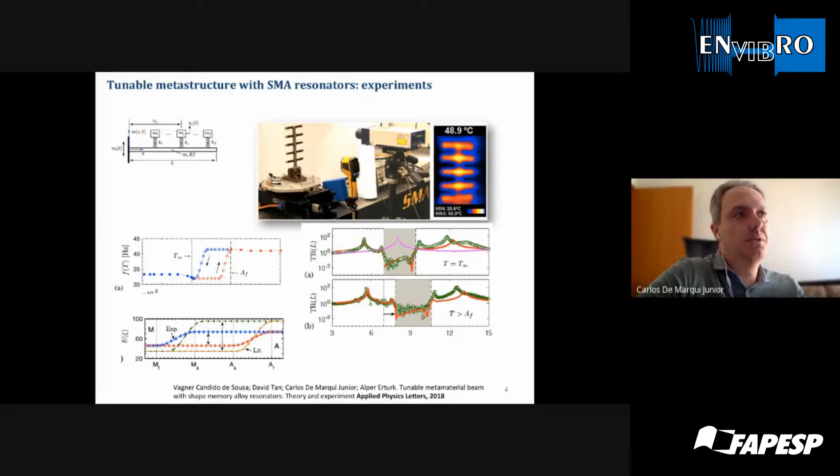We have some previous experience with Vagner Sousa, who nowadays is an assistant professor at Unesp São João da Boa Vista, with shape memory alloy-based metamaterials. So we have this experimental setup with a beam and SMA-based resonators. It's a thermomechanical system where we can control the band gap position by controlling the temperature of these resonators. We also have some experience with piezoelectric metamaterials combined with analog shunt circuits.

And more recently, we developed some digitally controlled analog circuits with which we could obtain this super wide attenuation zone in a piezoelectric metamaterial. It's reported in this paper. More recently, we started to develop some digital shunt circuits in order to replace the analog shunt circuits. And the idea is to improve the tunability or adaptability of these metamaterials.

And these digital shunts are working, and we could validate them for a resistive shunt and for a resistive-inductive shunt. So these are the numerical, the analog and the experimental results for the digital shunts, so they are working. What's interesting in this case, if you compare this picture here, this is the experimental setup for a single unit cell. It's a beam with piezo.

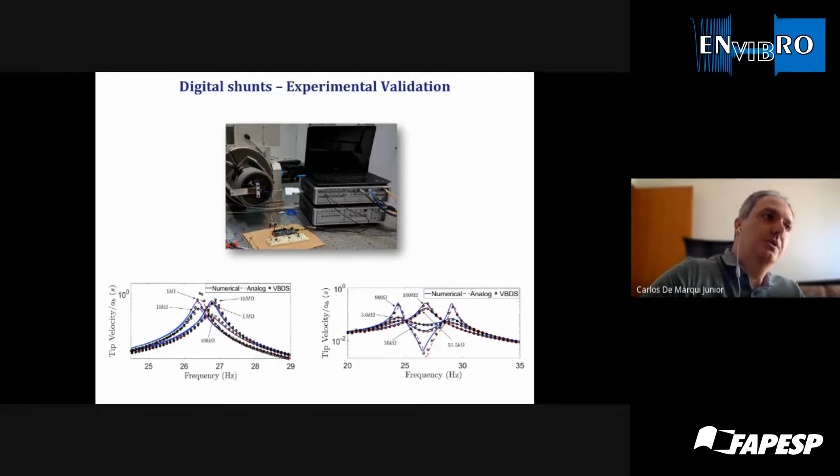If you compare with this previous one, where we were using analog circuits, the quantity of electrical elements and connections here has been reduced to only a few elements, since everything is inside the digital board. This digital shunt will be used in this, sorry, the picture is not very good, in this metamaterial beam. It's an aluminum beam with 12 piezos periodically distributed along the beam and connected to this digital shunt.

So if you believe that one of these setups or this previous experience can be useful for your research, please just contact us. We are available to collaborate or to help if you think it's useful.

Okay. So again, to our schedule, I'd like to invite Professor Leopoldo de Oliveira to share his screen and start his talk on membrane smart metamaterials.

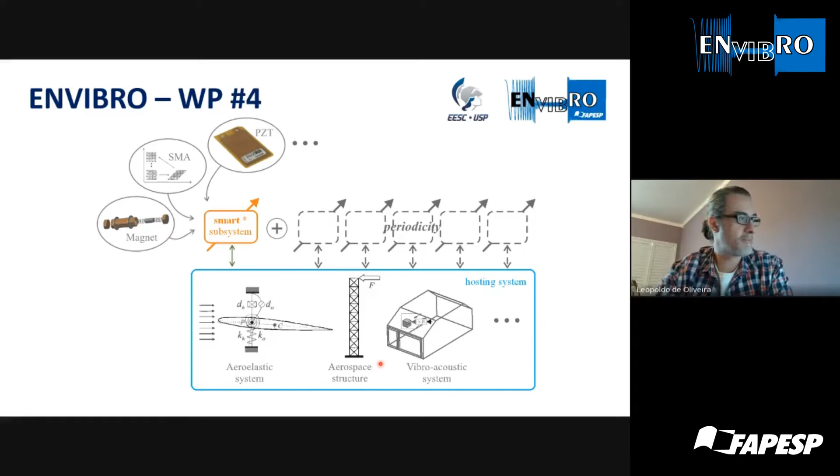Of course, for metamaterials, we consider that these unit cells will be repeated along a host structure, and this host structure can be of many kinds, including here, for example, things that we consider here in São Carlos, which is aeroelastic systems or vibroacoustic systems, or even structures that could be dedicated for aerospace applications.

So the first example I want to show you was like a clamped beam, where we include an increasing number of those unit cells to analyze the evolution of an attenuation band, because this is like a finite structure with boundary conditions, and the wave reflections here will promote such an attenuation band, not a band gap in the sense of a pure, ideally periodic structure. And as you see here, we were targeting the second resonant mode of the beam. And as from 10, 11, 12 elements, we reached a plateau on the performance. There we decided to build a setup to experimentally verify this phenomenon.

We start with a single degree of freedom mechanical resonance system and added piezoelectric elements and a shunt circuit with an inductor and internal resistance to realize this shunted unit cell. These are some simulations of the concept unit cell. This is built on plastic material, so on 3D printing. The piezo disc is glued to the beam, and this thinner part here will be the flexible element of our single degree of freedom system. This is the concentrated tip mass. This is a picture of the first prototype with the disc.

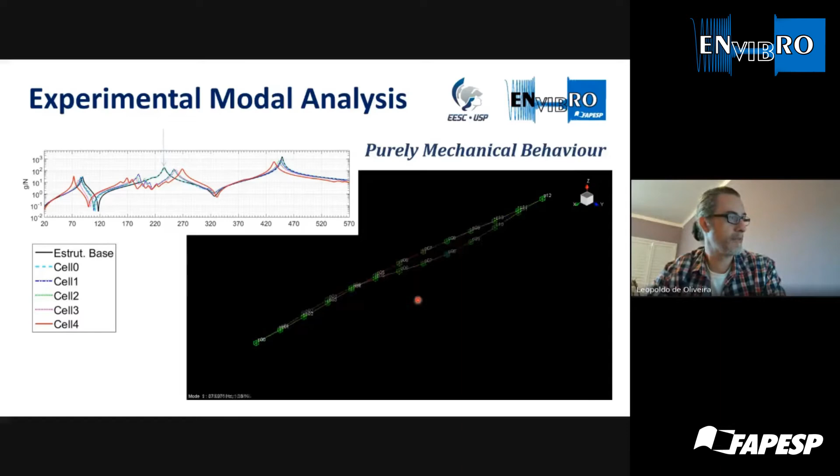So, of course, when we have the empty beam, we have vibration modes as expected, first, second, and third vibration modes. When we put several of those resonators to the beam, we see, for example, in the first resonance that they will move in phase with the beam, as they were designed to resonate close to the second mode. When we go close to the second mode, then the attenuation starts to work, and as you can see here, the beam is almost standing still, whereas the resonators vibrate resembling that second vibration mode of the beam.

Not all of them do in the same way, because it's, again, an experiment. There is variability, uncertainty in the manufacturing process, as well as in the assembly, where we glue them to the beam. The effective length of the bending is a result of where we exactly glue it. So although we have jigs to try and make it as close as possible to each other, there is always some imperfection. And since it's a finite structure and we do have those reflections, we can assume that there will be some poles, so resonances, if you like, within the attenuation band. And these are some of the modes that we see there. You see again, there's various configurations of the elements vibrating, and the structure remains still.

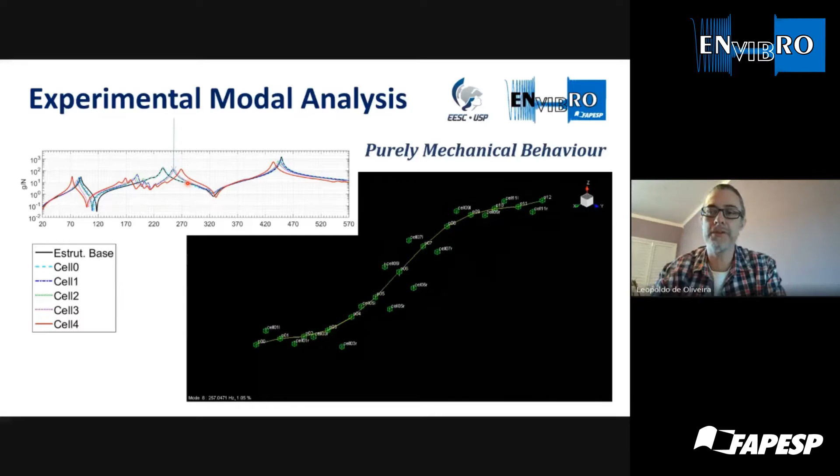So I'm going to jump here. If you follow the arrow there, you can see where we are. So when we reach a peak that is close to the border of the attenuation band, then the structure starts to vibrate again. So what happens when we assemble everything there? So we now have these extra degrees of freedom you see in the border are the voltage across the piezos. And now we are just monitoring the voltage, as the shunted circuits are not connected yet, so it's an open circuit. And there, in the attenuation band, we see now the masses vibrating, and we can see some voltage going through the piezos.

And okay, that's what we get from just a purely mechanical system, let's say, that is modified by the piezo, but without any attached circuits yet. Finally, when we do connect the shunt damping, the result looks like this. So the structure is standing still. Now you see the masses also vibrate, but not as strong as before.

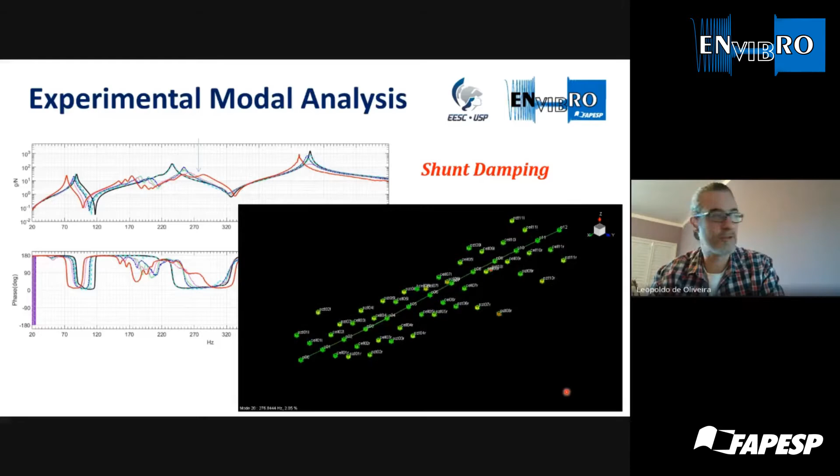And we see a lot of the energy going through the electrical domain. And the vibration you see here also actually represents the voltage going through the shunted circuit, which is now resonating and taking that energy away from the system.

As a second example, I want to talk about the membrane applications. We went for membranes because they will be very lightweight structures. And if we add a mass to the center of a stretched membrane, we get what they call a decorated membrane resonator, which will exhibit these two resonance modes.

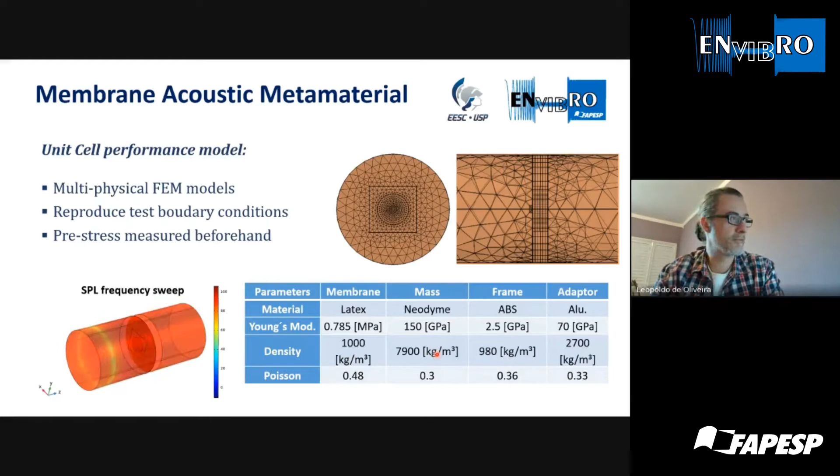Of course, in resonance, these systems will radiate a lot of noise, but in between those resonances, we expect to see an anti-resonance, and this anti-resonance is supposed to provide some transmission loss if we build a structure based on those decorated membranes. So we made some finite element model of the decorated membranes, and here are some values that have been updated based on these experiments that we carried out with the actual membranes.

So this is like a latex rubber material that we stretch. We have a means to control the amount of stretching we provide. Then we build these frames that will give the final shape of the membrane. Here's an example with various shapes and sizes of membranes. We glue it to the stretched rubber and finally get a membrane that we can assemble in such a transmission loss setup and analyze its performance.

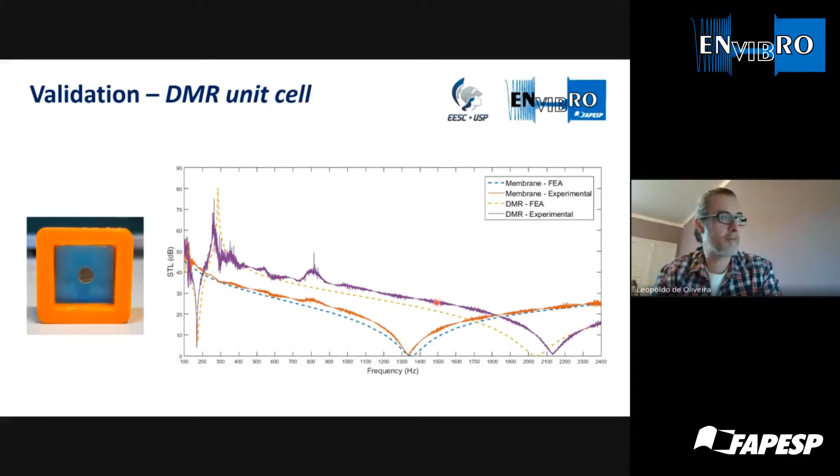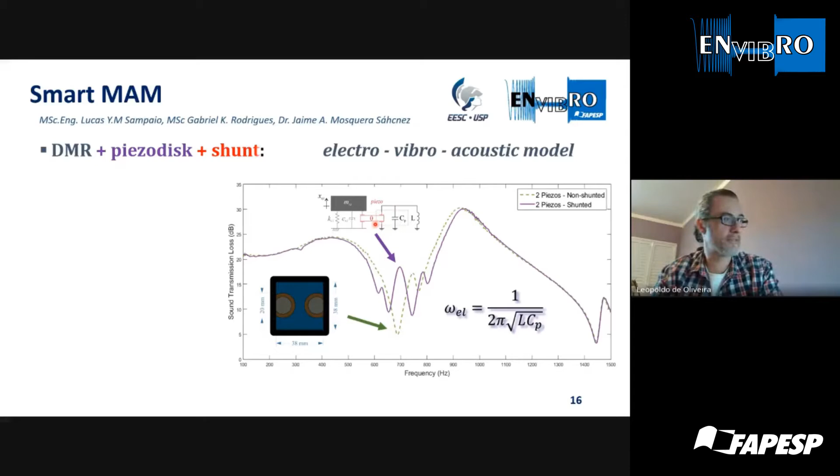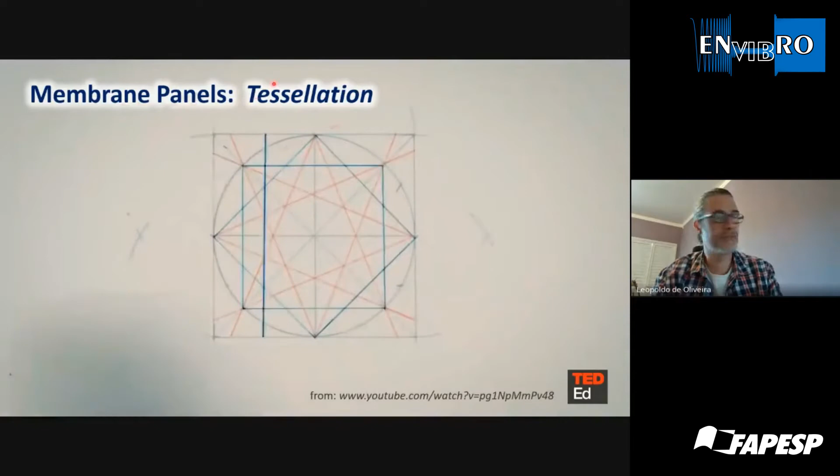To design such elements, for example, we can look into Islamic art. This is an example of how you derive those geometric shapes. And the interesting thing about these geometric shapes is from some lines and curves, you can draw some patterns that actually tessellate the plane. And by tessellation, I mean, when we look into geometry, you have those shapes that when they are combined, they will completely fill the space.

So if you think about a panel, we have a 2D space, and when you derive any forms based on those figures, you have automatically something that fills the plane and could have interesting vibroacoustic performance. To address this, we already did some initial trials with these kinds of combinations.

Of course, they are not squared repetitions of each other, so we still have to look into how to apply Floquet-Bloch boundary conditions to analyze those in an infinite sense. But we could already build some of those, simulate in a unit cell level, and see that they indeed have several resonances that broaden a bit the effect of transmission loss close to those resonances and anti-resonances.

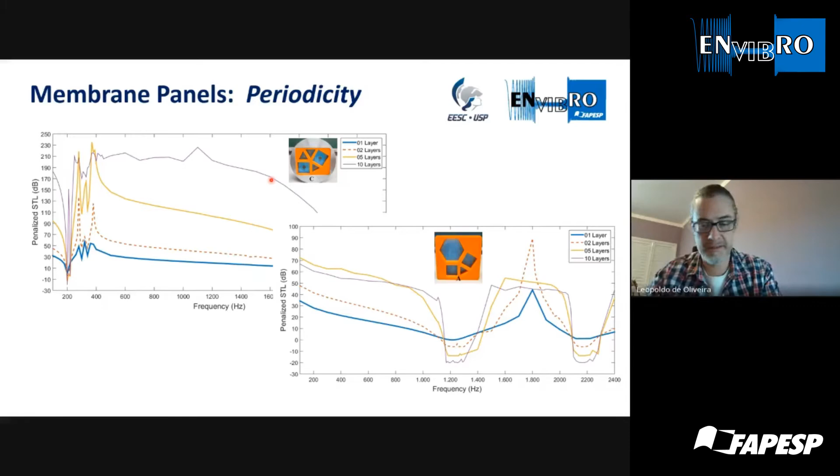We can add masses to some of those squares and not to others, and have indeed unit cells with several resonance frequencies. Just as a means of looking into the future a little bit, we want to further explore those smart elements inclusions and also have more complex circuits attached to them, so like nonlinear circuits, nonlinear energy sinks,

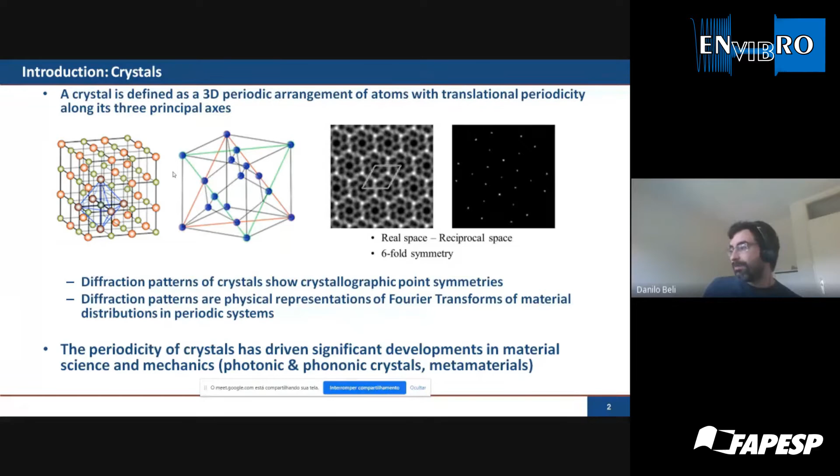And we can do differently. We can use other kinds of symmetries to provide a better way to manipulate waves, symmetries that are not allowed in the crystals. Let's see if this is possible. And in the 80s, Dan Shechtman discovered the quasicrystals, a way to fill the real space without repeating the unit cells.

And these quasicrystals also have this diffraction pattern that follows some order, but not the order of the crystals that follows the 2, 3, 4, or 6-fold symmetry, but an order that has a rotational symmetry that is not allowed for the crystals, like this one where you have 10 peaks with rotational symmetry. So it's possible to fill the space, but not with unit cells, in a different manner that can have other wave properties too.

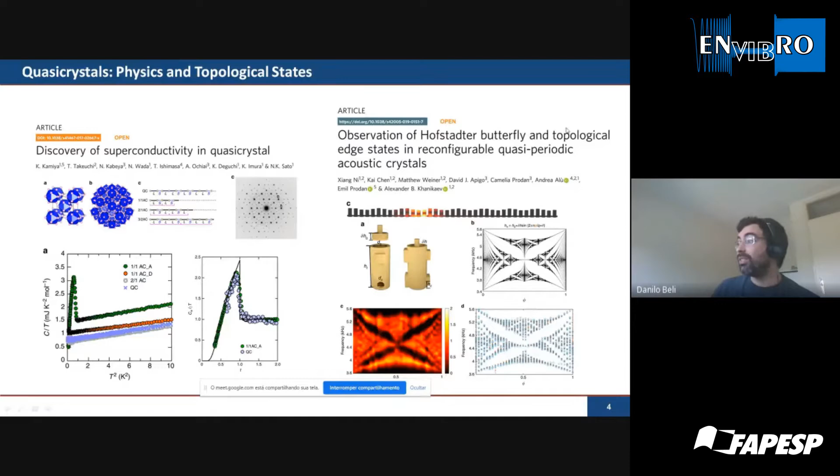So people started to look at the quasicrystals, and they discovered some phenomena related to superconductivity, and also topological states like Matheus presented last time, but also in mechanics to have isotropic stiffness or failure resistance, or even in wave propagation to have different band gaps or isotropic wave propagation. But here we are interested in the wave directionality and diffraction in high order fold symmetries that were not allowed for the crystals. But first I will show you how to design these quasi-periodic plates.

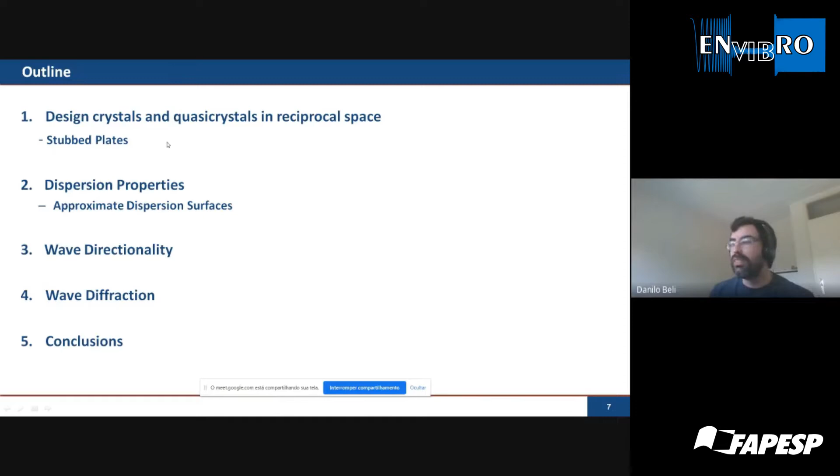And after, I will show you how to obtain some dispersion properties for these quasi-crystals and so on. Okay, so for the periodic cases, we have these rotational symmetries, and they are attached to this restriction theorem that it's possible to fill the space with these rotational symmetries in a tessellation procedure, where you can use 4-fold or 6-fold unit cells, or triangles, square unit cells, or hexagons, but not pentagons. If we use pentagons to fill the 2D space, you have some gaps or voids, so it's complicated to fill the space with symmetries that are not the ones that crystals have.

So how can we do that in a simple way? We use a procedure that was presented by Lubensky, where we assign peaks in a circle in the reciprocal space. The number of peaks here gives us the symmetry in the physical space. So we have peaks that are equally spaced in the reciprocal space. And by using this equation here, like an inverse Fourier transform, you can recover the physical space.

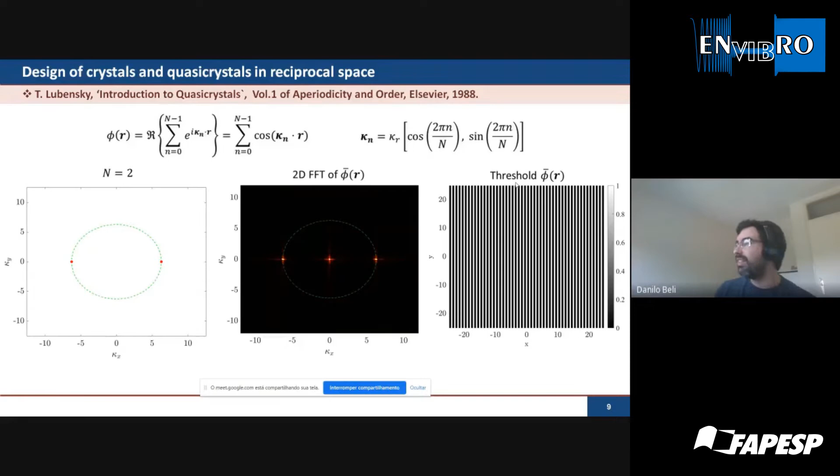Like here, I assign just 2 peaks, so I have a bilayer distribution. And this bilayer distribution has the same spectral contents of our design, but here you have a peak in the middle that gives us the DC level, okay? Here we also have a threshold that I will not explain here, but in the next slide it will be more clear how this threshold works, okay?

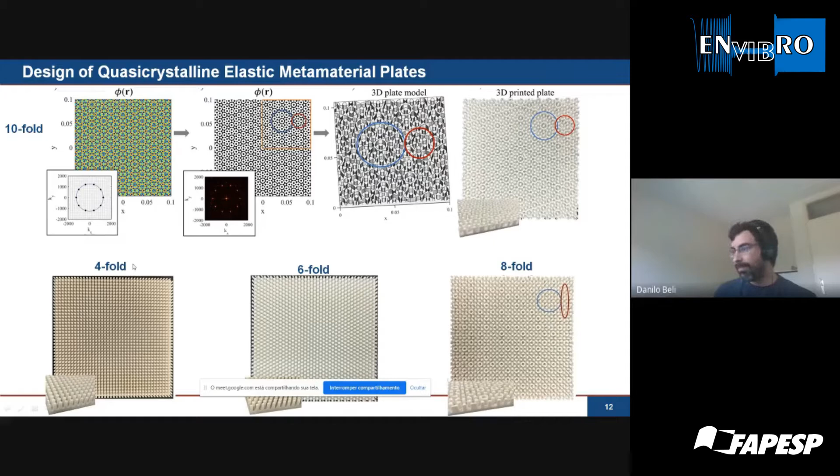And we did the same for other fold symmetries, like the 4-fold, 6-fold, and 8-fold, so we can compare the quasi-crystals with the crystals: what is common and what is different between them, okay? But how can we investigate these quasi-crystals if we don't have translational periodicity? We cannot apply the Bloch-Floquet conditions at the boundaries of these quasi-crystals. How do you define a unit cell?

So we used an indirect approach based on time simulation. With this time simulation, we have a full space. We recovered the displacement field in x, y, and time. So we have a fully populated cube here with displacement points, okay? And we can compute the Fourier transform to transform the physical space into reciprocal space. But again, all the points in this cube have a wave, so we cannot see anything.

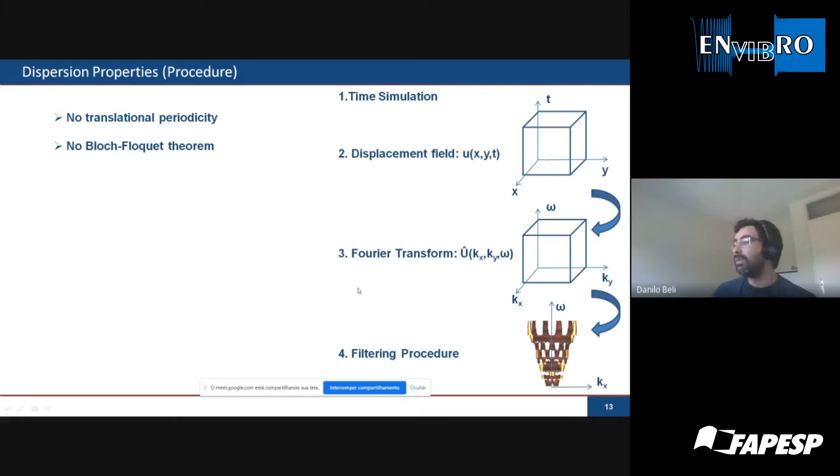So we need to apply filtering to this Fourier transform. We neglect the waves with low amplitude because they don't influence our dynamic response, and only consider the waves with high amplitude. So we can see the spectral contents that we wanted. And the advantage of this procedure is that we can also compare with experiments. If you perform the experiment on the plate, with your excitation in the center, and you measure the displacement field over several times, you can do this same procedure and compare with the numerical simulations, okay?

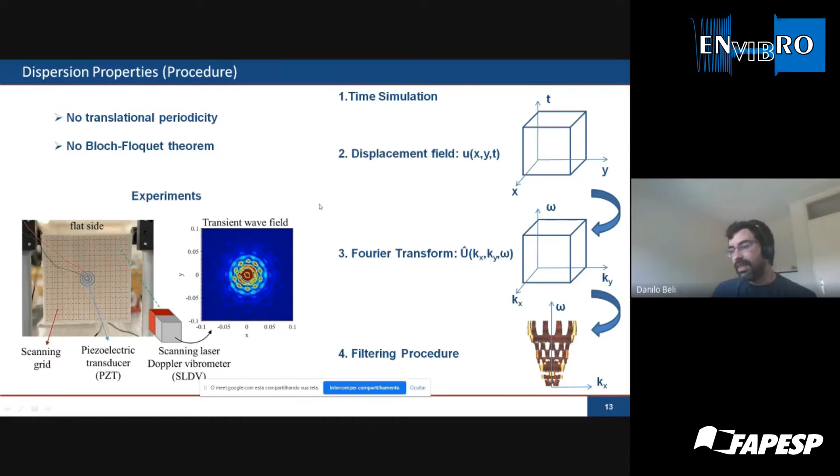So let's see what you have for, but first, we also validate this procedure for the 4-fold. So we can compute the band structure by applying the Bloch-Floquet conditions. And this is our approximated band structure. So we can see that the gaps match in 10 and 50 kilohertz, but also the propagating bands are the same. We can see the frequency response here.

But in our case, for the 4-fold, we don't have any anisotropies, so we have circular wave number contours. But what happens for the quasi-crystals? Because we have the same pillars for the crystals, for 4-fold and 6-fold, we have the same pillars. So it opens band gaps in the same frequencies here for the 4-fold and 6-fold, okay? And our propagating band, it's isotropic.

But for the quasi-crystals, we also have the gaps here around 10 kilohertz and 50 kilohertz, but this band here splits in several bands. So we have a fractal nature of these bands because of the fractal nature of the quasi-crystals. And they are highly anisotropic and they change with the frequency. So we can use these bands to manipulate the waves in a better way and also to have a high order wave beaming, as we'll show in the next slide.

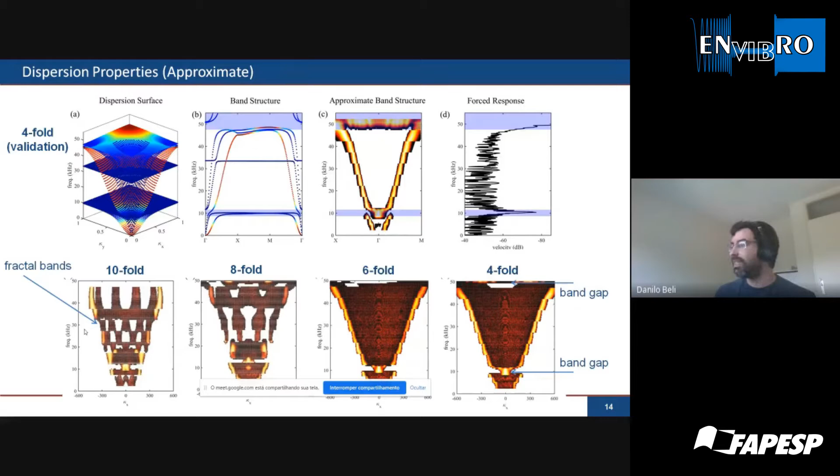Okay, but let's see what happens in the time domain, in the physical domain. If we consider a frequency here almost closer to the first gap, you can see this beaming in the tenfold symmetry. If you change to a higher frequency, you can see that the beaming happens twisted between this one. So these results expand the results of the crystals, because before the beaming was just allowed in the symmetries of the crystals, like 4-fold, 6-fold, but not in 10-fold.

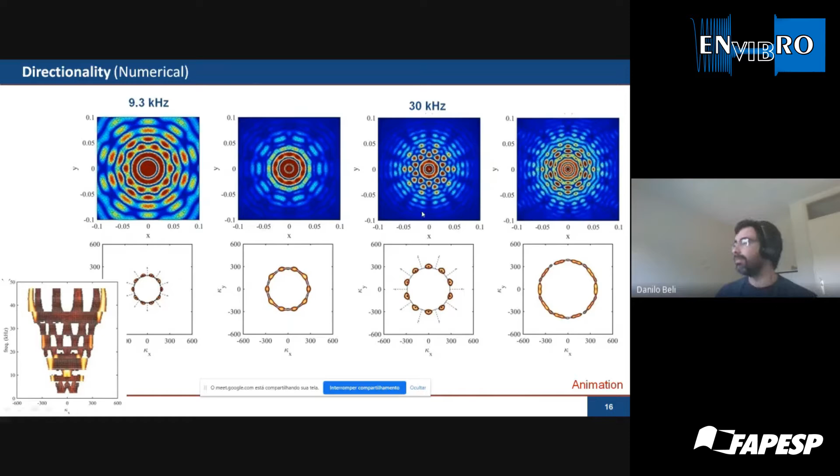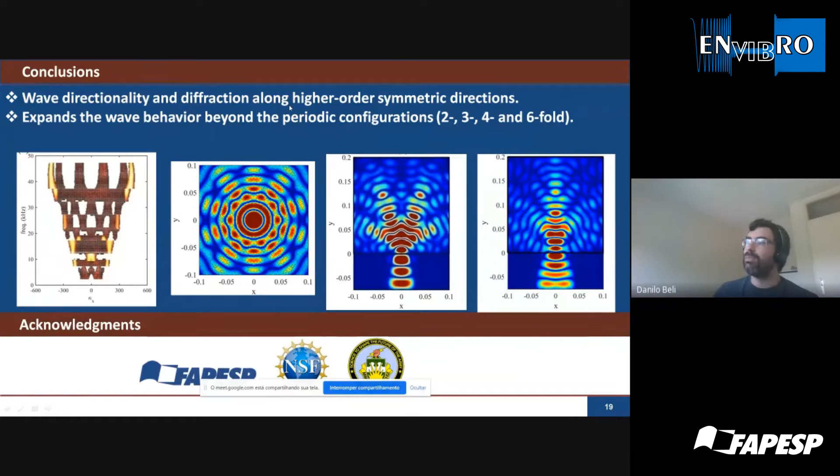I don't know if I took too much time to explain, but these are the conclusions: the wave directionality and diffraction along the higher order symmetric directions, and also we expanded the wave behavior beyond the periodic configurations. Okay, and we already published this paper on the left, whose results I didn't show, but it explains a lot of the designs, and the results that I showed today we'll publish soon. Maybe it will be on arXiv soon.

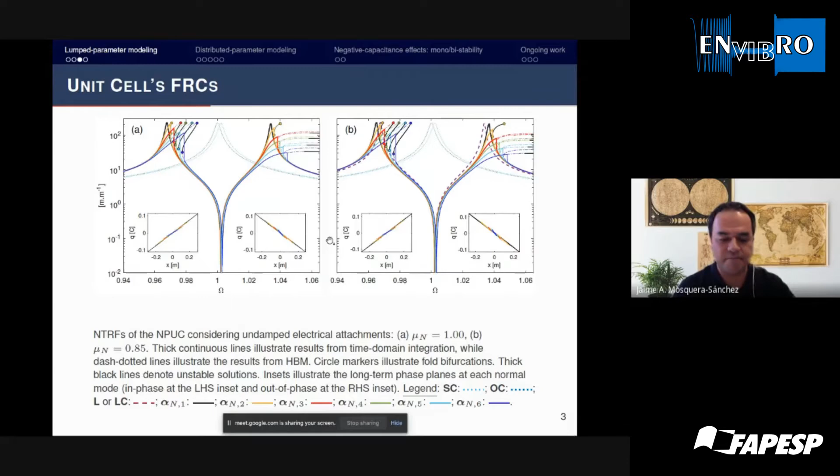Well, and after that, we proceeded to integrate the equations of motion for a set of 20 nonlinear unit cells, and we verified the effects of the nonlinear part and the negative capacitance part.

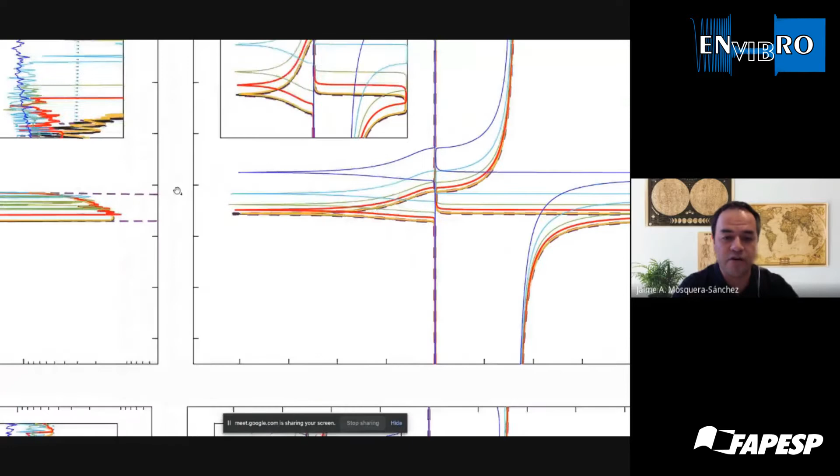Well, so in order to understand the effects, we also developed some analytical expressions to study the band structure of such a unit cell, in which we identified that as the level of nonlinearity increases in our system, the band gap location and limits start shifting to the right side, to high frequencies. And we also verified such a behavior with the forced responses of the system, in which we can also see that the band gap limits or edges are starting to shift to the right side.

And another particular observation we also obtained is that as the level of nonlinearity increases in the system, the band gap starts becoming dominated by some harmonic and quasi-periodic solutions, which are proof of the wave supratransmission effect.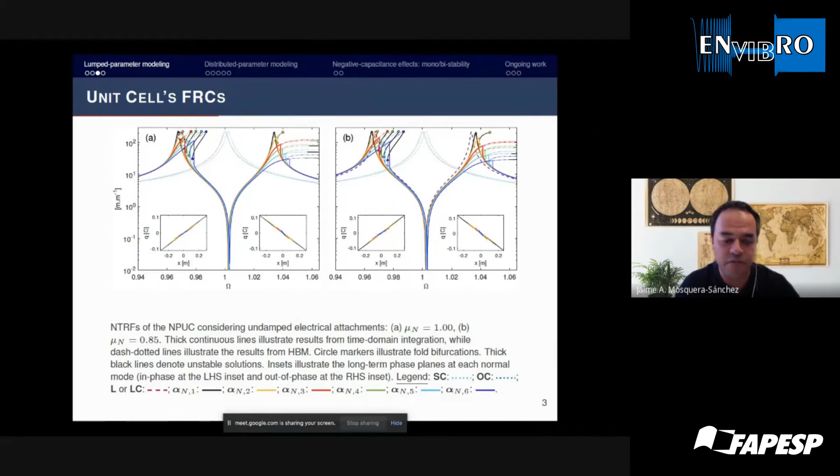Such an effect can be traced back to the emergence of the fold bifurcation, which is happening, let me show, at the first in-phase mode. So as the fold bifurcation starts shifting to the right side, the wave supratransmission effect becomes apparent in the responses. And this effect happens at both kinds of oscillators, I mean, in the Duffing oscillator and in the essentially nonlinear oscillator as well.

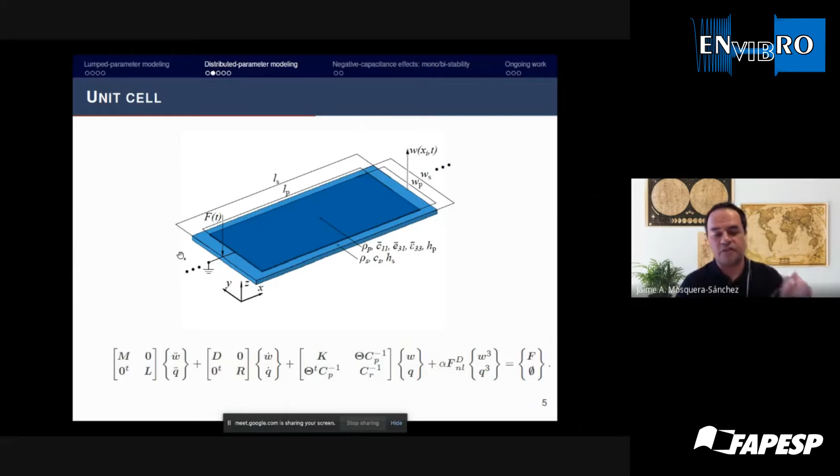Well, moving to a distributed parameters model, we used a 1D beam provided with several equally positioned unit cells with the same parameters, and we started studying the forced responses of the unit cell, in which we found the same effects as the ones we found in the lumped parameter models.

And we also could study the transmissibilities of such kind of unit cell, in which we can see that as the level of nonlinearity increases in the system, the transmissibility in this case becomes flat within the band in which the transmissibility is low. Those results are related to the unit cell.

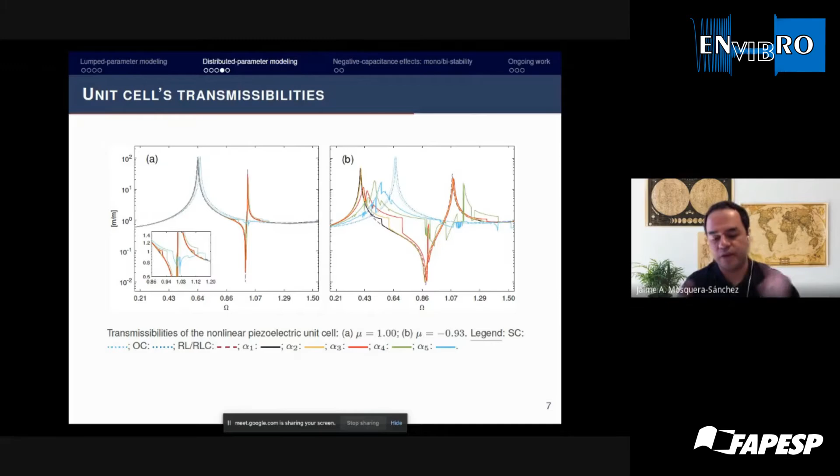So in order to study the metastructure effects, we integrated the equation of motion for a set of 12 unit cells in a beam. And I will show you only the transmissibility results, in which we can see the following observations. So along the rows, we can find the effects of the negative capacitance, in which we can see that the linear band gap is opening as the negative capacitance improves.

And we can also see the effect of the cubic part in the circuit, in which we can see that as the level of nonlinearity increases in the system, the band gap's limits become shifted to the right side. And as the level of the nonlinearity becomes quite high, we can see that the transmissibility gets flat, and this is due to the effect of the wave supratransmission effects.

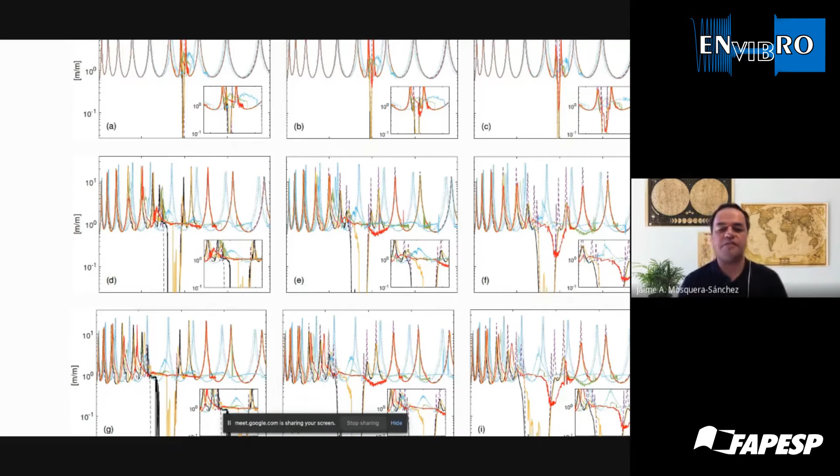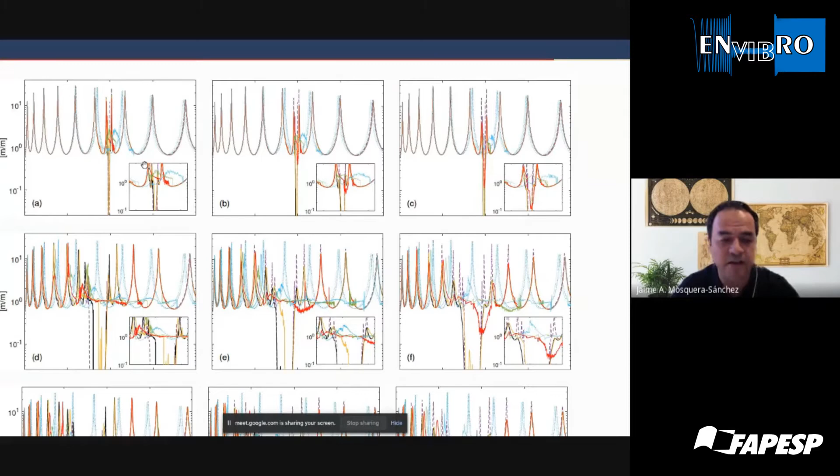In the columns, we can see the effects of the damping in the electrical circuit, in which we can see that for the Duffing oscillator, the small band gap starts becoming apparent. And as the damping becomes more evident in the system, the damping becomes the dominant mechanism in the system. So the cubic part becomes masked in some sense, giving rise to more linear effects. And such behavior was verified in the other combinations of the negative capacitance.

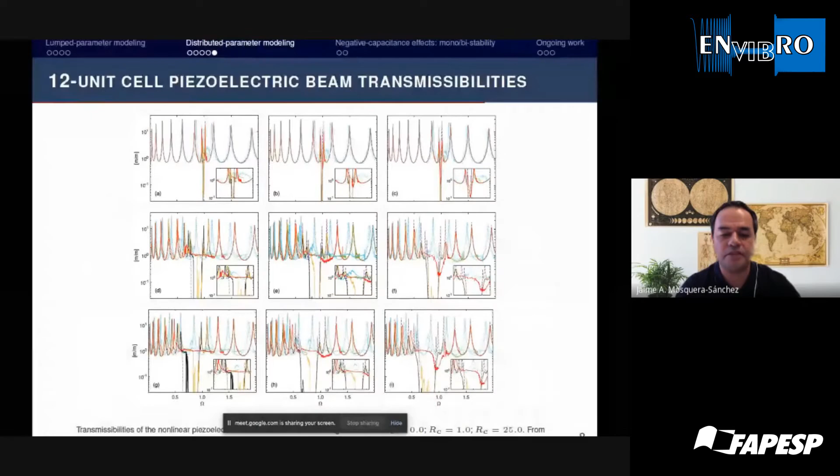Okay, so those are the results from my metastructure. And last, I will show you some preliminary results on the effect of monostable and bistable circuits in the system. This slide is quite heavy, so I will ask you to wait a while.

Okay, so those results are based on the sign of the negative capacitance, in which, as we have a linear positive residual capacitance in our system, we will have monostable resonators. While if we have a linear but negative part in our oscillator, we will have a bistable resonator.

In those cases, we can see that we can shift the edges of the band gap, of the band region in which we have a transmissibility below 1, to the right in the monostable case, while for the bistable resonator we can move the band gap edges to the other direction, I mean to the left direction.

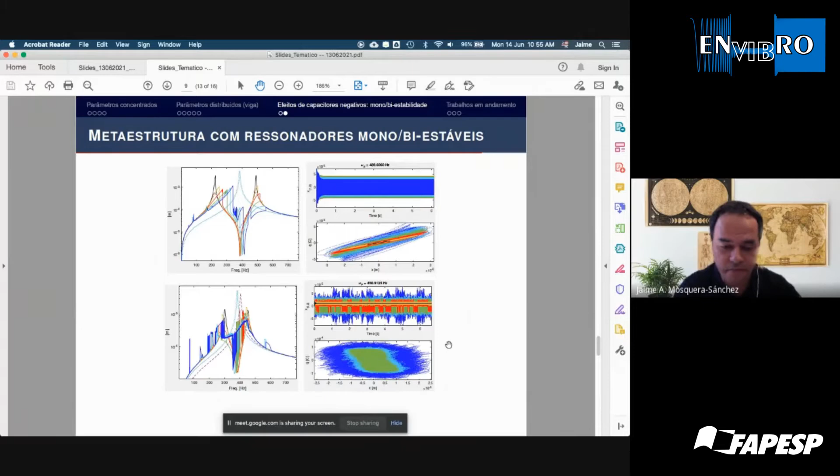So for the monostable case, we have the displacements around one stable point at the 0 point. And for the bistable case, we can see the intrawell and interwell behavior, which accounts for shifting the band gap limits to the left side, instead of the monostable resonator, which shifts the band gap limits to the right side.

Okay, so, oh my God. No, I will be unable to show you the responses.

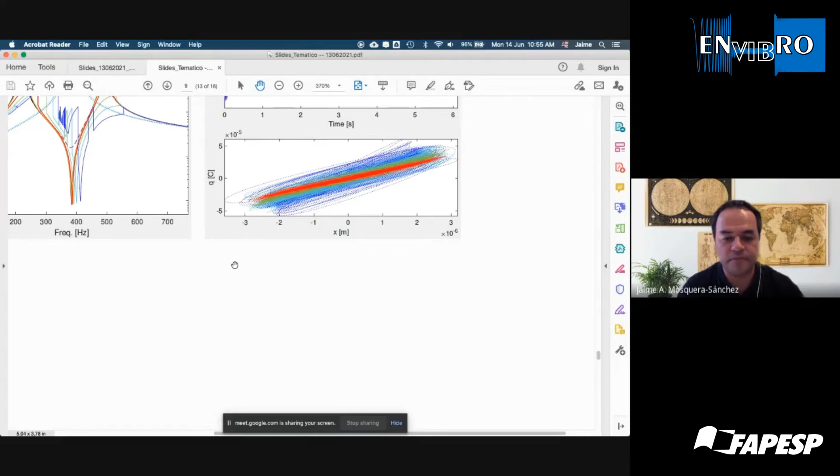Okay, so for the lowest nonlinear regimes, we can see that the displacement happens around one stable point, which is offset from the 0 position. And as the level of nonlinearity increases in the system, we can see some intrawell and interwell displacements, while the highest nonlinear levels will show quasi-periodic and chaotic behaviors. So those are preliminary results which are still under study.

So let me conclude with some ongoing work. But yeah, my computer is about to crash.

Okay, so to conclude, I will show you some numerical works which are ongoing. So the mono and bistable resonators are currently being integrated by using some high-performance computers here at the University of São Paulo. We're also approaching some plates to see the effects of the negative capacitance and the cubic part in the vibration attenuation. And finally, we are also studying the band gap formation using internal resonances.

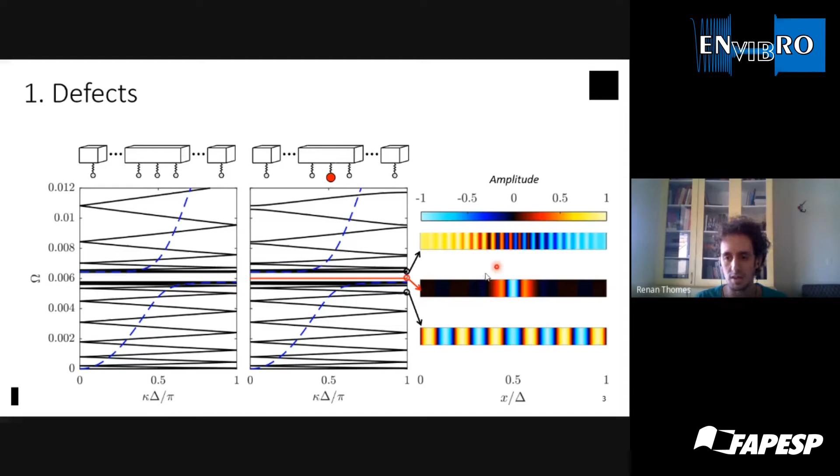So we all know that a series of local resonators attached to a host structure will open a band gap close to their resonance. And if we have a defect in one of those resonators, for example, a different mass here, that will cause a defect band to appear inside that band gap and wave localization around this defected unit cell.

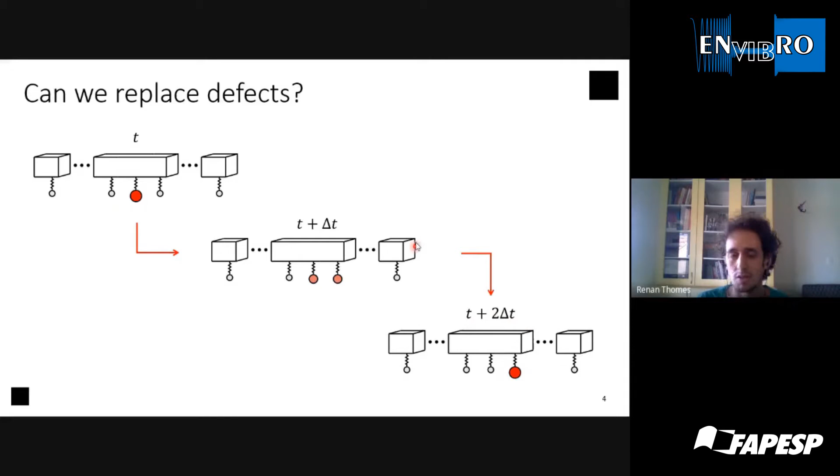However, can we somehow replace those defects along the structure in order to concentrate energy at specific locations and specific times? Well, with piezoelectric materials, we actually can.

But the point here is that we can actually change these inductances with respect to time by using digital circuits or even analog circuits too. So with this, we can modify the properties, the dynamic properties of these resonators as a function of space and time.

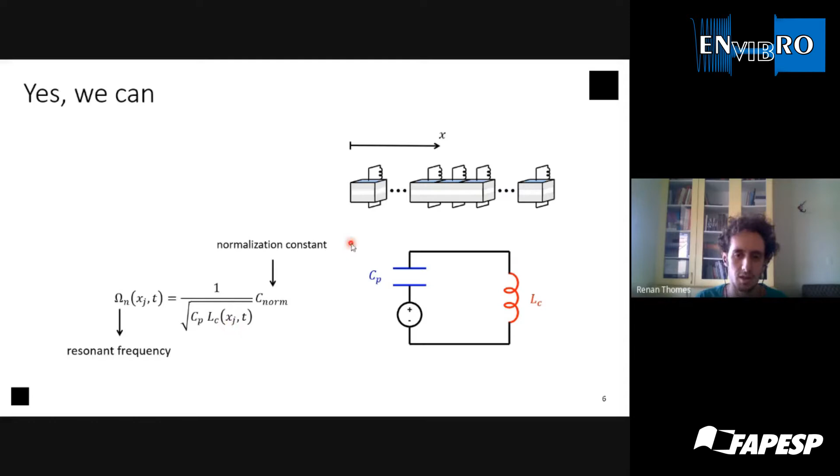And for doing this, we are studying this electromechanical metastructure. It is a beam composed of 21 local resonators and unit cells. And throughout this presentation, I will say that a resonator is in the periodic configuration if its resonant frequency equals omega t, which is the tuning frequency. And I will say that the resonator is in a defect configuration if omega n equals 2 omega t.

And the band structures that I showed you before are actually for our electromechanical supercell. So when all the resonators are in the periodic configuration, we have the traditional band gap here. But when we have a defect at the 11th resonator, which is in the middle of this beam, we'll also have this defect band with concentrated energy around here.

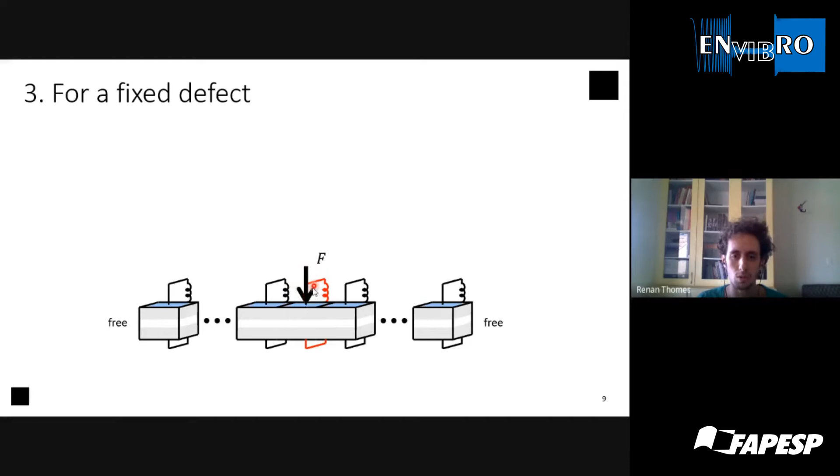So after this spectral analysis, we're going to study now the time domain response for a fixed defect. And for this, we're considering free boundary conditions. And we have also a defect at the 11th resonator here. And we are applying a point load in the middle of this beam, which is a sine burst at the defect band frequency. And for these considerations, we have this response. Actually, this is the envelope of the response.

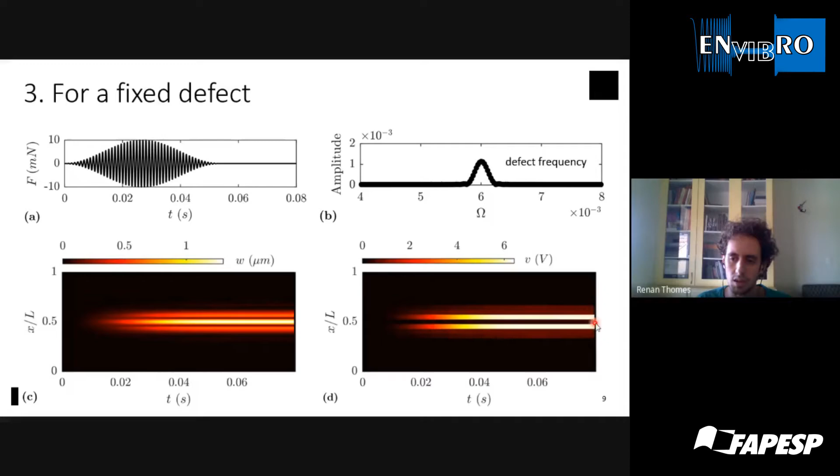But here in the left, we have the transverse displacement of the beam as a function of time and the position along the beam. And as expected, we have concentrated vibrations here around the defected unit cell. And this figure here in the right shows the voltage output in the piezoelectric elements. And notice that for the resonator that has the defect, the voltage output is almost zero since it's excited far from resonance, and maximum voltage occurs in the cells adjacent to the defect.

Now we are going to program those defects along the structure. That is, we're going to replace those defects along this beam. And for this, we're going to impose a law to the resonant frequency of those resonators. But remember that we are actually changing the inductances of these circuits.

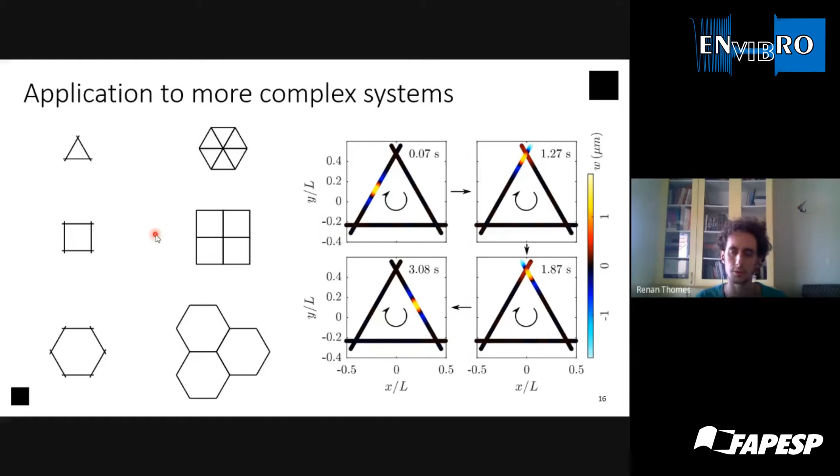In conclusion, we presented a piezoelectric metamaterial whose space-time modulation of the resonant shunts creates programmable defects, and our strategy perfectly transfers energy between subsequent unit cells and confines vibration energy in space and time. And these concepts may also be applied to guiding, sensing, monitoring, and energy harvesting.

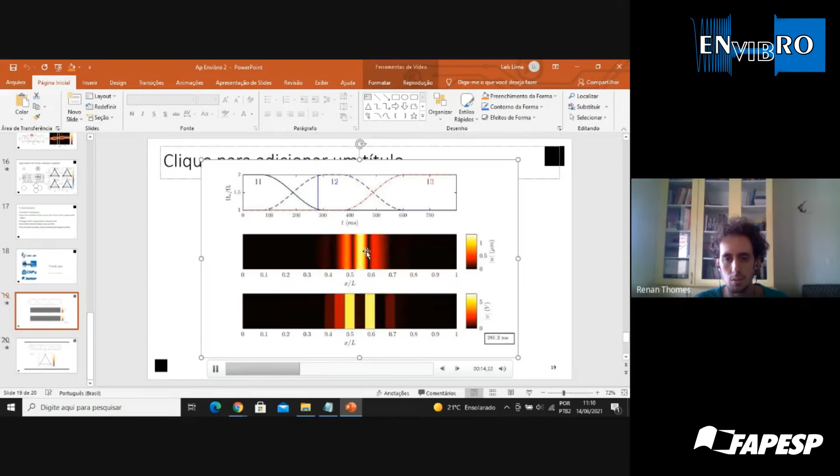So before I stop talking, or while you think, I'd like to show you a video of the theme that I presented. So we begin with localized energy here at the middle, and then as we change the electrical resonances of the system, this energy begins to be displaced and transferred to the right-hand side of the beam.

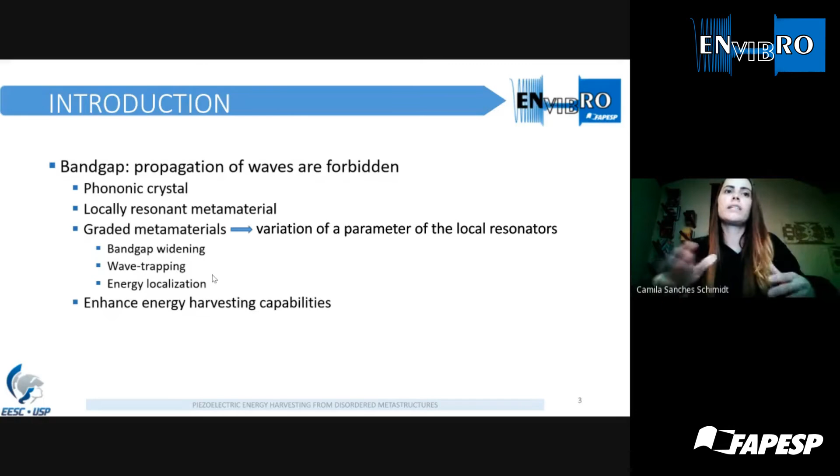And this variation produces band gap widening, wave trapping, and energy localization. And this energy localization can be used to enhance the energy harvesting capability. However, energy cancellation occurs when continuous electrodes cover the strain nodes. Then, in the present work, a criterion for electrode segmentation will be presented to avoid the energy cancellation.

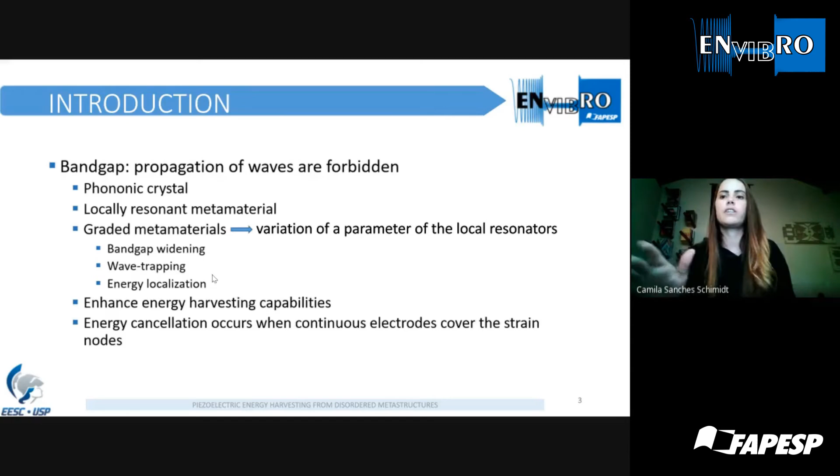The system studied is a cantilever bimorph beam made from an aluminum substructure with piezoelectric ceramic layers of PZT-5A under harmonic base excitation with 15 mechanical absorbers. The configuration of the electrodes for energy harvesting will be analyzed in two cases, continuous and segmented. But in all cases, they are connected in parallel to a resistive admittance.

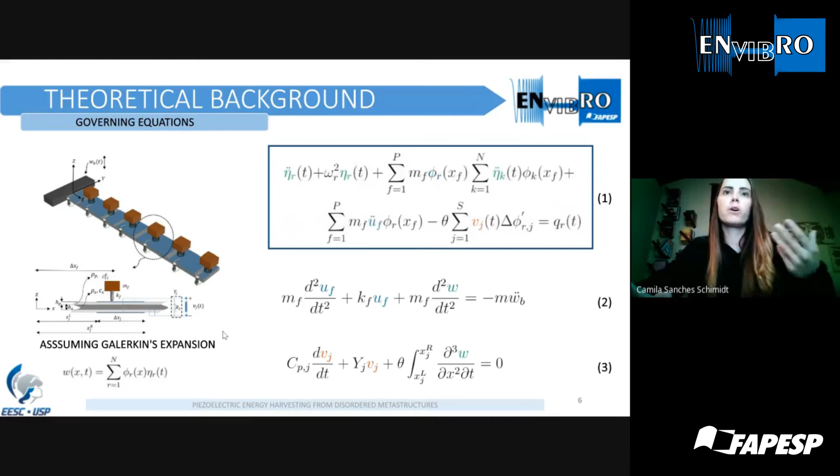The governing equations for the bimorph, absorbers and shunt circuits were obtained considering Euler-Bernoulli theory. Then, assuming Galerkin's expansion, we can obtain our equations in the modal domain for the bimorph, absorbers, and shunt circuits. Then, assuming that the response of the system is harmonic at a target frequency, we have the amplitude for the absorbers and voltage amplitude. And substituting this expression in the modal governing equation, we have our final expression.

To obtain the graded metamaterial, a variability in the frequency of the absorbers, which follows this linear law, was adopted, where omega k is the natural frequency of the beam, beta is the slope disorder degree, n is the number of absorbers, delta is the distance between them, and L is the length of the beam.

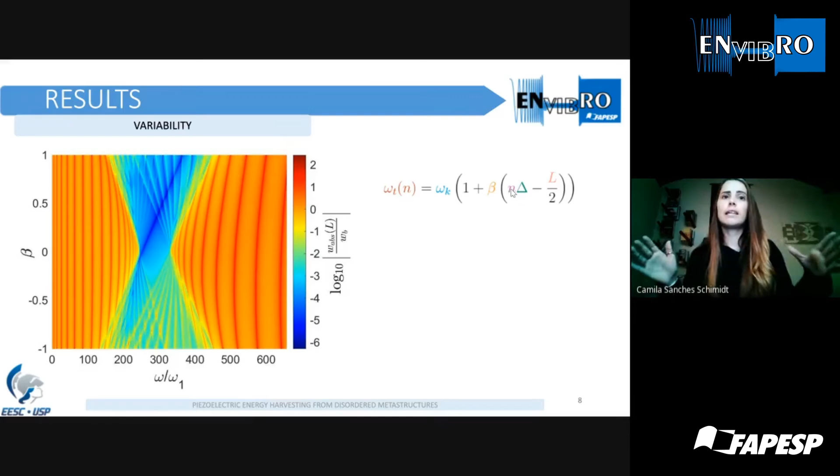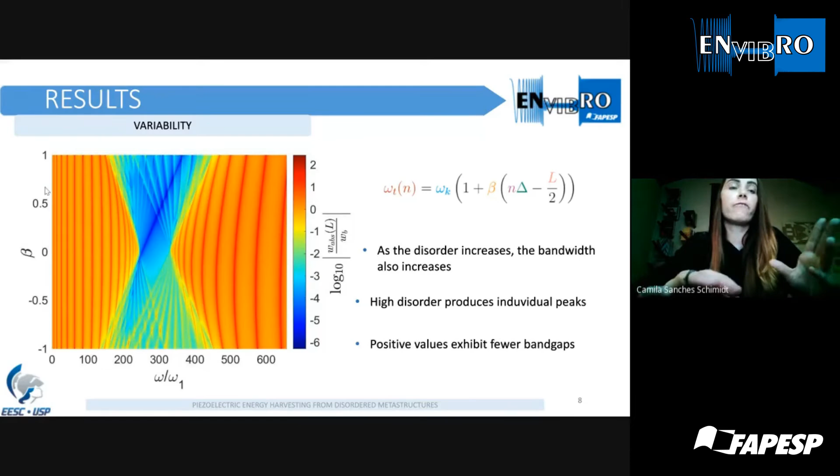From the figure, it's possible to see that as the disorder increases, the bandwidth increases. And high disorder produces peaks of vibration between the individual band gaps. And positive beta values exhibit fewer band gaps than negative ones.

The transmissibility was investigated for descending, uniform, and ascending patterns. For the descending and ascending patterns, it's possible to see that the bandwidth varies along the frequency and metastructure length. Then the wave trapping phenomenon occurs below a reflection interface that divides propagation and non-propagation zones. And when all the absorbers are tuned at the same frequency, a uniform and well-defined band gap is created.

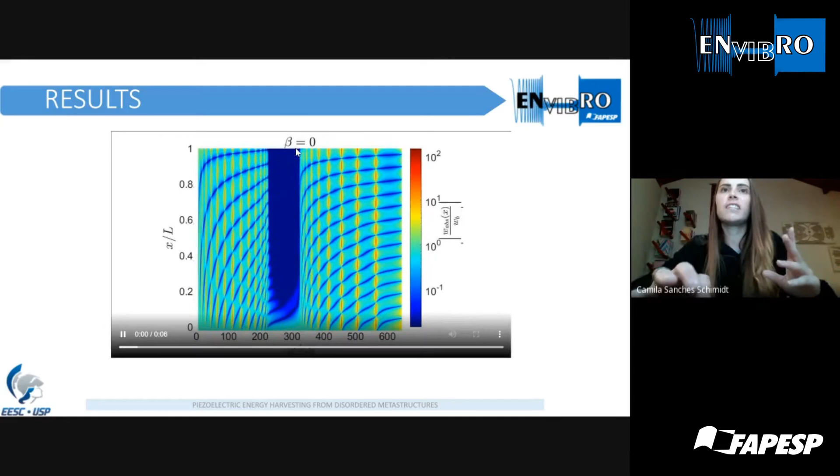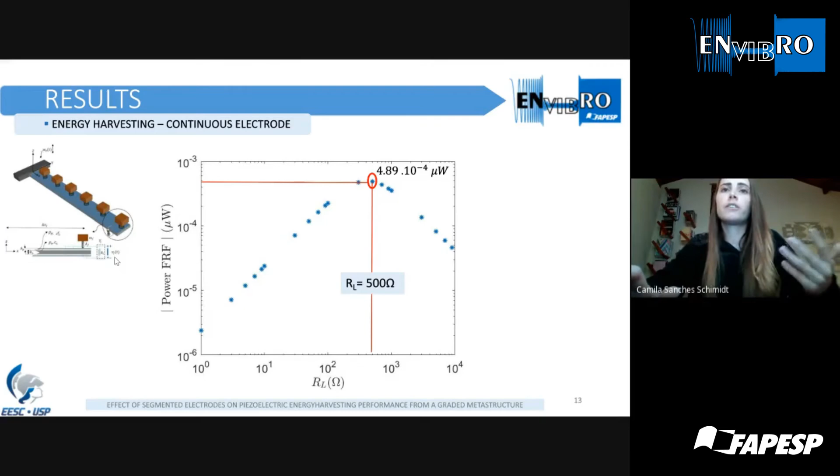Then, considering this frequency and this disorder, the energy harvesting was analyzed for a continuous configuration of the electrodes. And the maximum power harvested is when a resistive load equal to 500 ohms is adopted. But as presented by Erturk et al., vibration modes have certain strain nodes where the dynamic strain distributions change sign. Then, covering these strain nodes with continuous electrodes, cancellation occurs.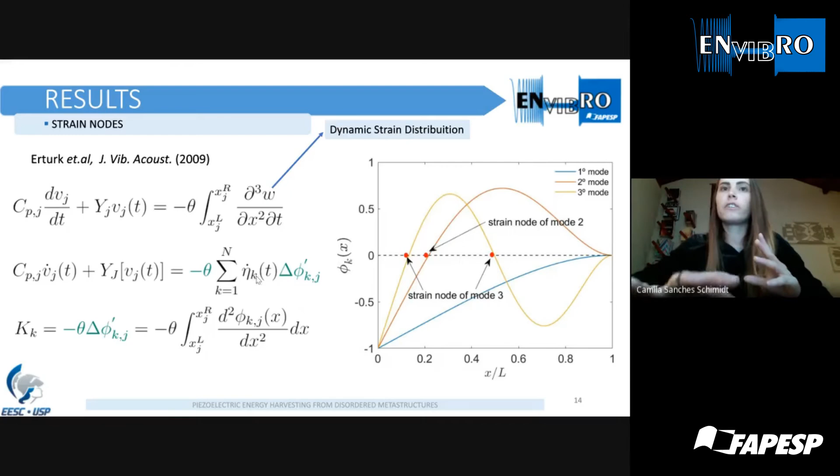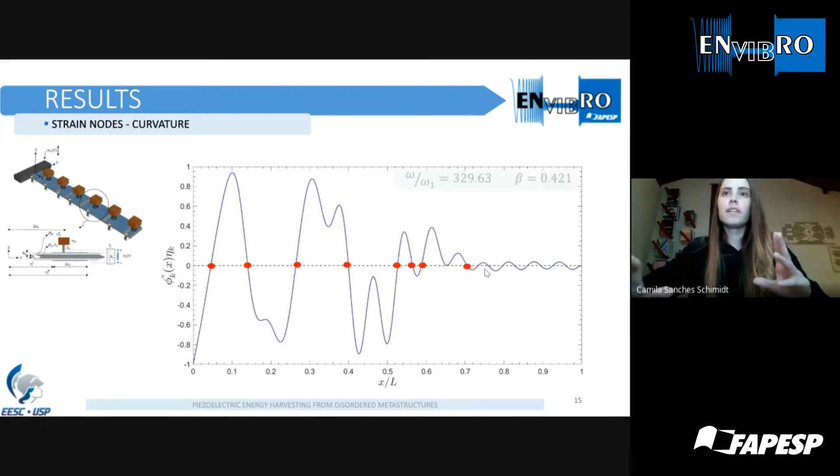If the electric charge developed at opposite sides of a strain node is collected by a continuous electrode, cancellation occurs due to the phase difference in the strain distribution. Mathematically, the partial areas of the integrand term will cancel each other. Then, to avoid the energy cancellation, the curvature was plotted, and 8 segments are necessary for this frequency and this disorder. Then, the power output was again analyzed for this configuration.

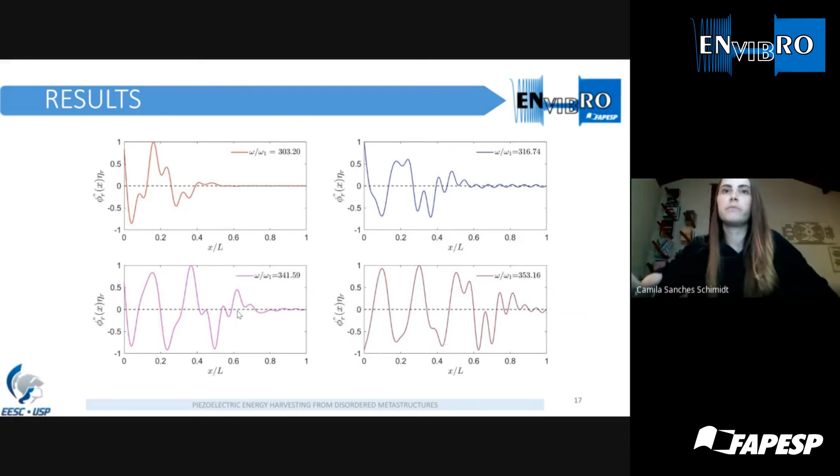From the results previously presented, it's possible to see that the variability increases the attenuation bandwidth, and the wave trapping and the energy localization occur, and this phenomenon can be used for energy harvesting. Then, when you compare a continuous configuration with a segmented one, a strong cancellation occurs if you adopt a continuous configuration.

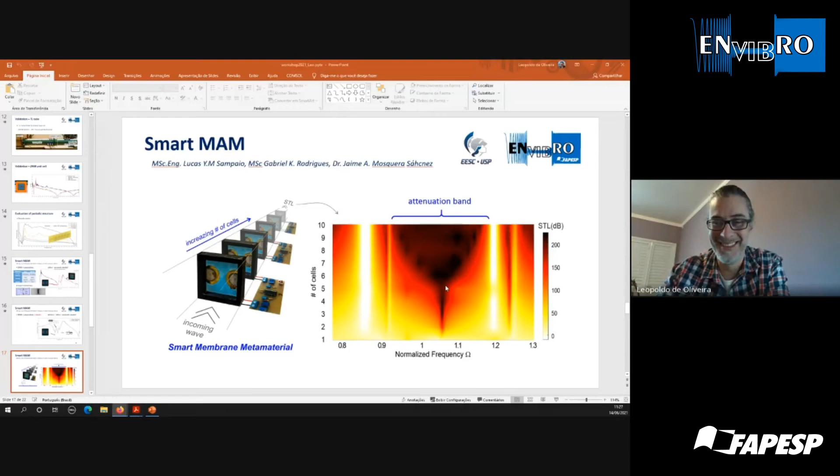Sorry. No, okay. I get it. I was misinterpreting this graph too. You have this attenuation band from the unit cell, all right? Yeah, right. So here. Okay, that's it, my question. Thank you.

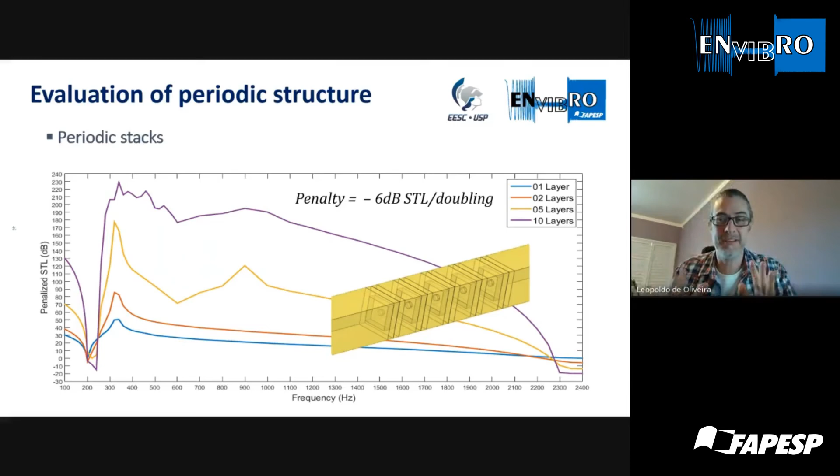So first thing is, indeed, it's a plane wave exercise, so the wave is hitting those membranes directly facing forward. So if we had a full panel of those membranes, the behavior would be basically the same, right? So when we do the waveguide, either numerically or experimentally, we are trying to simulate just this plane wave incidence on the panel. And adding several layers is a bit the same as, I imagine, having a rod, like in a crystal, and adding resonators to your unit cells.

So in a way, you have that. You also have the transmission loss phenomenon, but you are adding layers, so you have more mass in your system. And to try to avoid that interpretation there, we add a penalty sometimes to these analyses. And this penalty is we decrease 6 dB from the transmission loss every time we double the mass of the system. So when I start with one cell, I have certain transmission loss.

When I put the second layer, we analyze the transmission loss, but then we remove 6 dB from there to say, okay, that's 6 dB from the doubling of the mass, if we are close to mass law anyway. And we were doing it as such. So every time we added a new layer, we analyze it again and penalize the curves.

That's on one side. On the other hand, there's also this thing that we did not try yet. That was just removing the membranes from here and leaving out the frames to see what's the effect only of the shrinking, and like you already have a filter there, right? An acoustic filter by changing the cross section.

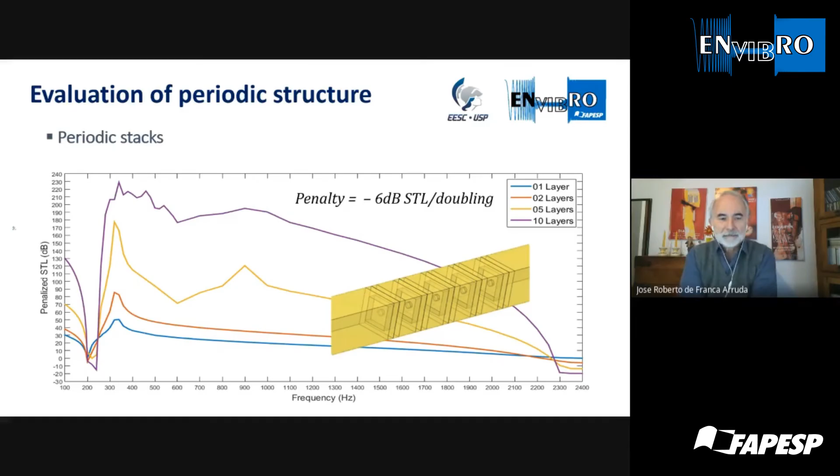Yes, it would be interesting to try to have a waveguide formulation, analytical or numerical. Analytical, I think, even if it's approximate, to try to come up with, let's say, a dispersion diagram for the system and look into the physics of this, which is not usual. So I understand the periodicity is, if you use that along a waveguide, a tube, that's the basic idea. And then there's another periodicity, which is the plate 2D periodicity, which would also play somehow.

Yeah, and the third thing I would add is that there we try to explore an anti-resonance effect. I stopped sharing my screen, sorry. If we take only the passive one, we have the internal resonance of the unit cell, which is something we want to avoid actually, because that's where the noise will be transmitted. So we're trying to explore the anti-resonance there.

And what happens when we add those systems in a periodic fashion with anti-resonances? It's not really a resonance. And they may couple, of course. They can be coupled through acoustics. Yeah. Thank you. Interesting. Thank you, Leopoldo.

If I may, Carlos, just a question which will be sort of a general question for discussion, maybe at the end. Just let people ask particular questions, and then we could make a discussion, because there are two approaches. Renan has shown how to program a defect and put the defect wherever you want in a periodic medium. And Camila showed how to use varying properties to trap energy for energy harvesting.

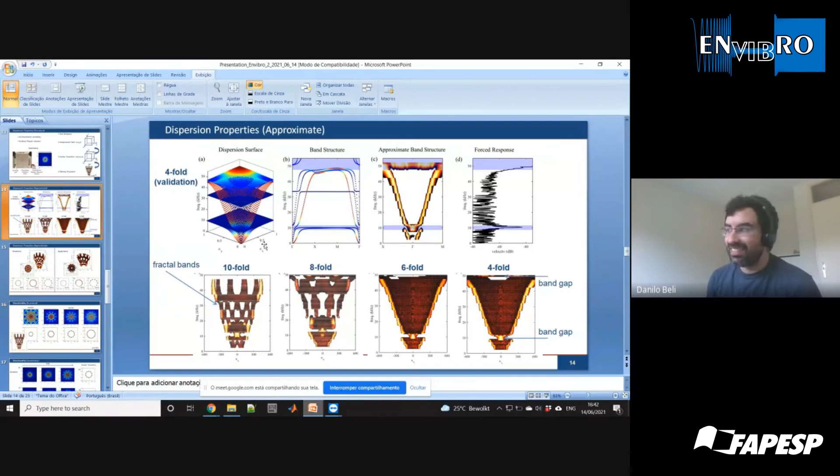But it's slow. It's a lot of data, and to compute the Fourier transform, like I did here, I use small parts of the time simulation to reconstruct it. But I also need to improve the transition between one simulation and another to make it smoother. But yeah, it takes a lot of time to compute this.

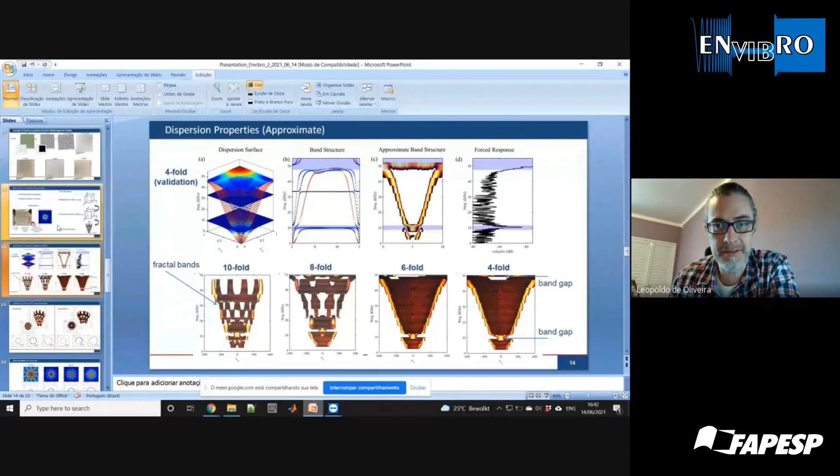Danilo, from a practical point of view, I assume you built those plates with selective laser sintering on ABS or something like that? They look like plastic, polymer, like selective laser sintering. Yes, it's the normal one. And then you measure on the flat side of the plate, right? Yes. We measure on the flat side and also excite the flat side of the plate.

Okay, and the equipment you use, because it's a white plate, do you need any treatment on the surface? No. This is a scanning laser Doppler vibrometer. We don't need any treatment on the surface. You can also put some reflective material to improve the measurement, but it's not necessary in this case. And it's measuring in-plane vibration.

Out of plane vibration. Out of plane. Yes, because this laser just measures one axis, so we are measuring just the out of plane, so the flexural or bending waves that you are interested in. You need a very fine mesh. You need to measure on a lot of points to come up with those plots.

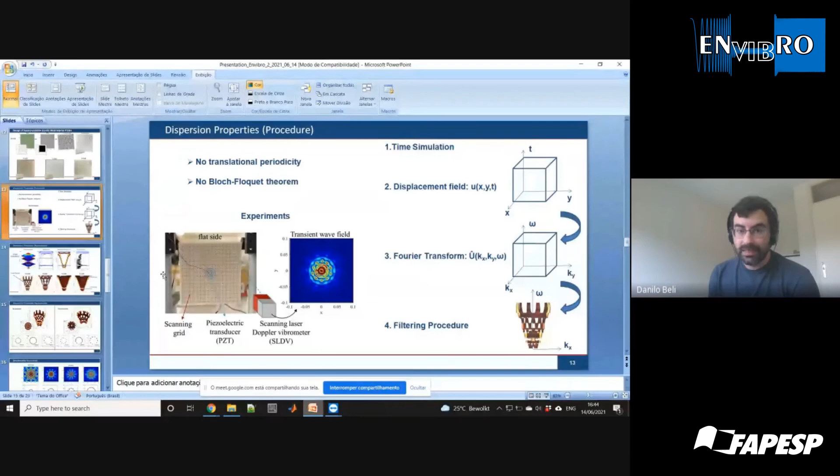Yes. How long does it take to do a full measurement of the plate? I didn't perform the experiments, it was Mateus. I'm just processing the data, but I think that it takes a half hour maybe, or 15 minutes. It's not too long. And if I may add, you measure the flat surface. Yes, the complete flat surface.

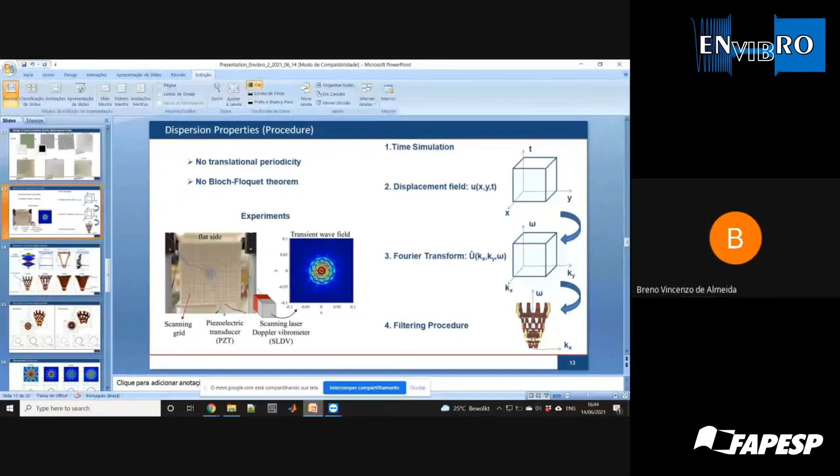So thank you. Any other question? Breno, please. Hi, yes, hello. Thank you for the presentations. I really enjoy this subject.

I have a question which is sort of in line with what Professor Arruda asked before. Because generally, from what I understand, piezoelectric harvesting is performed from low-frequency vibrations, right? So if you add periodicity, Bragg scattering, and localized energy phenomena, you generally analyze higher frequency vibrations.

Now, what I would like to know is if you compare energy harvested from these higher frequencies, such as Camila's electrode segmentation strategy, to first order frequency vibration energy harvesting, like a simple cantilevered beam with continuous electrodes. Do you compare the possible harvested energy from these? It would be interesting.

Okay, thank you. No, we have not compared. But you're right. On the other hand, you could argue that for many ambient vibration sources, you don't have very low vibration, and you're just studying different methods to increase the harvesting. Yes, it's a very theoretical case in her work, but I think we can bring these localized modes to lower frequencies and do energy harvesting.